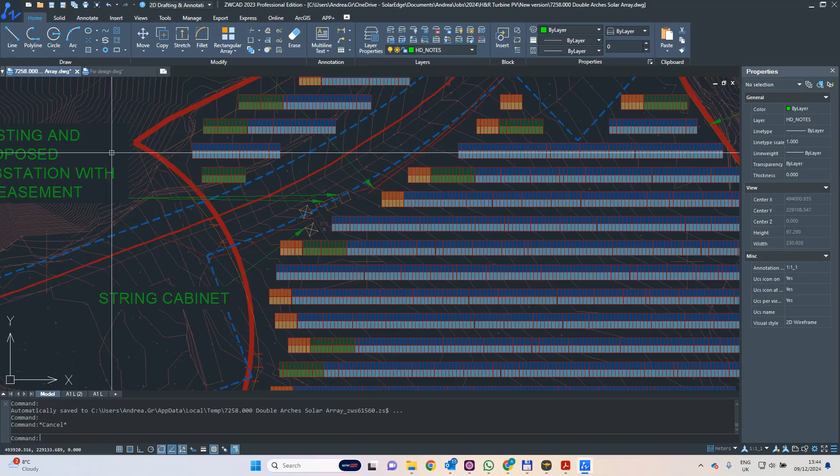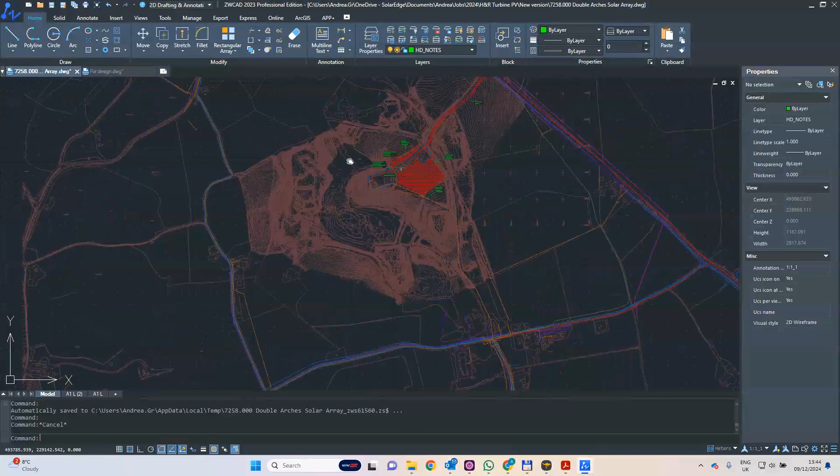Hi everybody, in this video I want to show you how to create a DXF file ready to be imported in Designer. Today I chose this design, which is a solar farm. As you can see, there are quite a few panels here, and there's a lot of things in this design that I don't actually need.

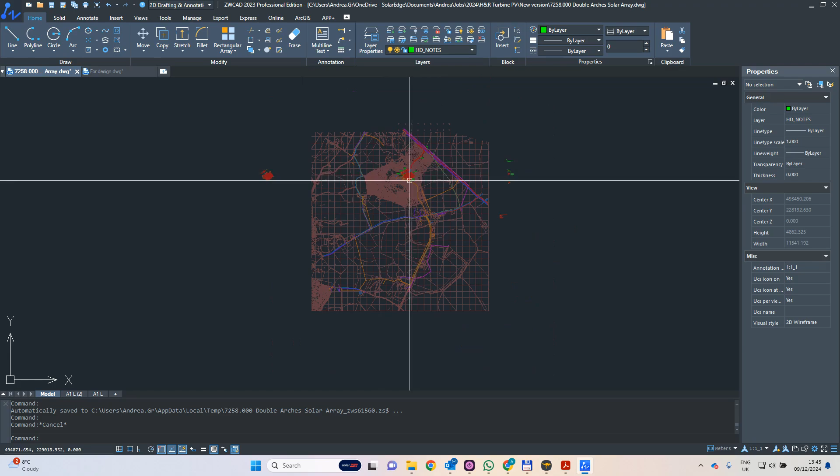As you can see also on top here, there's a lot of layout that I don't need. So the first thing you need to do when you prepare your file for Designer is to get rid of everything you don't need. You just need to identify what you actually need. In my case, what I need is the area where the panels will be installed and the panels themselves. I don't need any color, any fancy stuff, anything.

So first thing, clean everything. When I did that and cleaned everything, this is the final result. As you can see, this design is much cleaner. There's only the area where I want to put my panels and the panels themselves. Now, as you can notice, the layout of this drawing is also reduced to only 1 and 2, because those are the two that I needed.

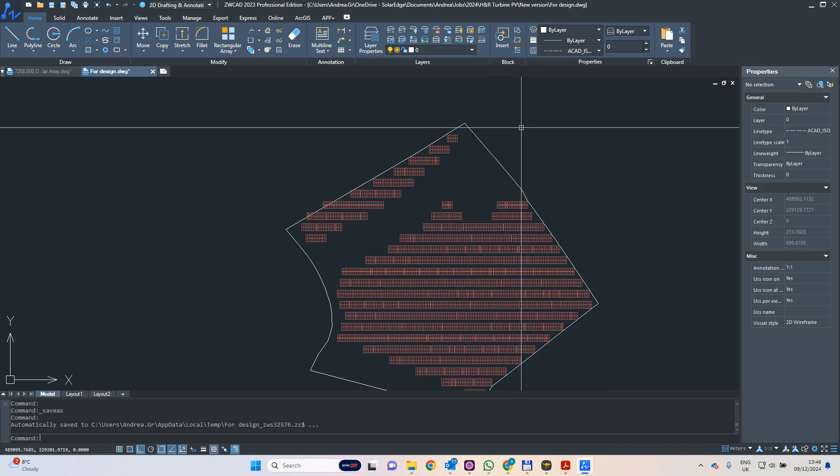If you have any obstacle, just add a third one, call it obstacle, where you put your obstacle on it. But what Designer needs is a layer 0, or layer called roof, where you put the layout of the building itself, and a layer called PV, where you put your panels, and eventually your obstacle.

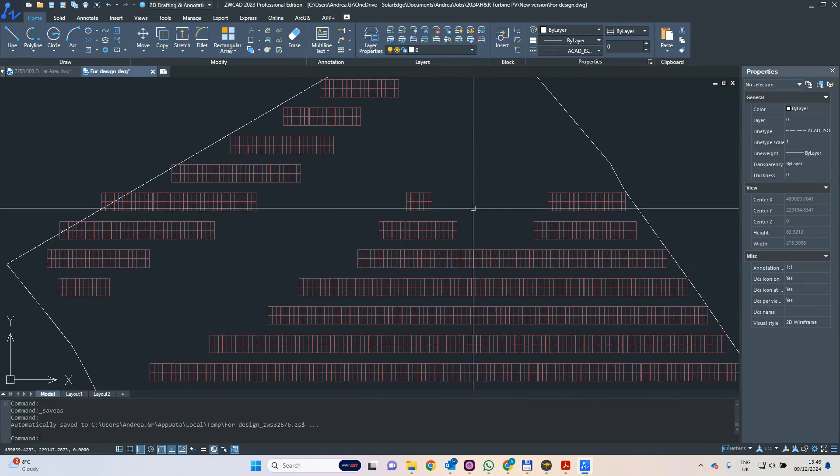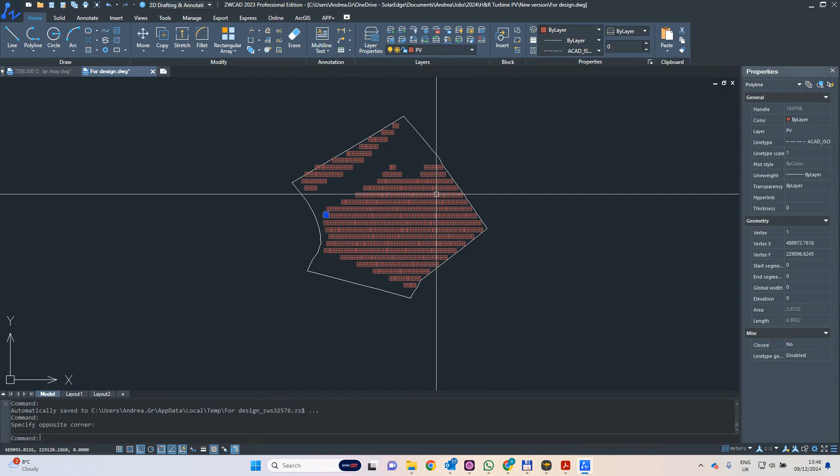Just a few notes on the design. What I did is I also redesigned the panels because they were only lines. But in order for the software to identify the panels, I needed to create polylines. So I created a polyline for each panel, just duplicated, really easy, really simple. In AutoCAD, you can do those operations quite quickly compared to Designer.

So now I have my design here. I need to convert this DWG to DXF. How to do it is really simple: you just go to Save As. When you arrive on Save As, you choose the name of the design you want. You open this window and you'll see that most likely you have the option to save as DXF at the bottom there, so choose the one you want. I think 2018 is absolutely fine. When you're happy with that, click Save and you're ready to go.

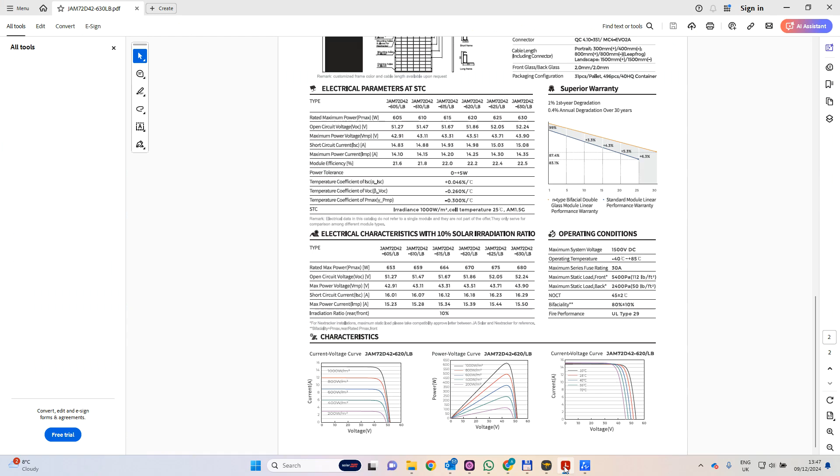When this is done, afterward you just need to jump into Designer. Of course, you need to prepare Designer ready for the DXF. In this case, I already prepared my design. I've already identified the area where I need to import my layout and also my DXF. But also what I did is I prepared the DXF of the panels that I wanted to use.

So now I'm going to go back into Designer. Really simple, I'm going to click on DXF. I'm going to choose browse on the computer for the DXF file that I created in order to import. In this case, I'm already in the right folder, I called that one previously for design. So I'm going to click on this one and open it.

So now, as I mentioned before, it's going to ask you for different layers. In this case, for me, the roof layer is layer 0, and the PV modules are the PV layer. Obstacle, in this case, I don't have any obstacle, so I didn't introduce that one. But if you have obstacles and put them in the layout, you will choose them from here. So now, when I've done this, move to the next step.

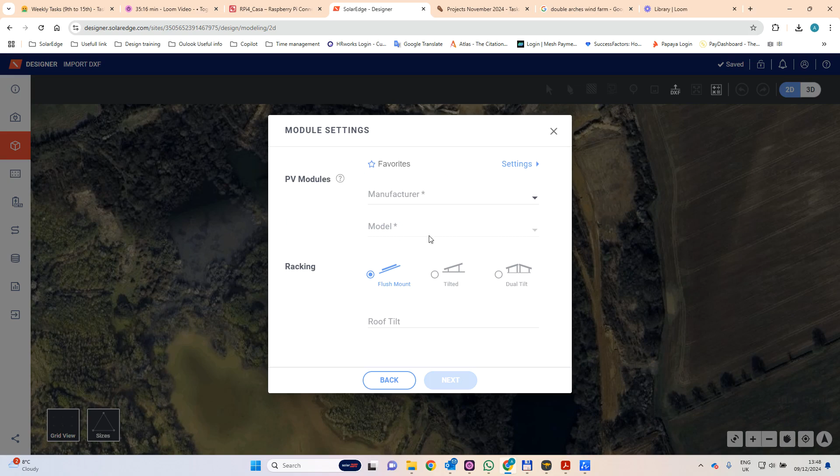Now it's my time to choose the panels. So like I did before, I have my PDF here. I'm going to go to JA Solar, and now we need to find the right panel.

JAM72D42, this one was mine that I created. Of course, tilt - you need to choose that, and you need to have the section. In this case, I have it on 25, and the height was 130, but this really doesn't matter for this example. I just want to show you that you need to have all the right details ready to introduce, because that is the data the software is going to work with.

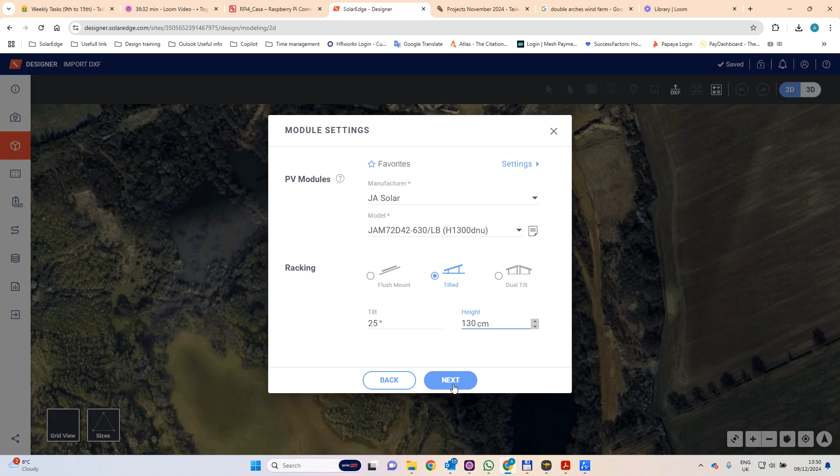When you've done all of this, you just press next, and the software processes the design and tells you the file has been uploaded. Now when I close, as you can see here, there is the layout of the area that I identified before, and if I go in here, there is the layout of the panels that I designed before.

Try to imagine if you had to design 3,840 panels one by one. In this case, as you can see, it's really simple - I import them, and they are in the exact location as per my design.

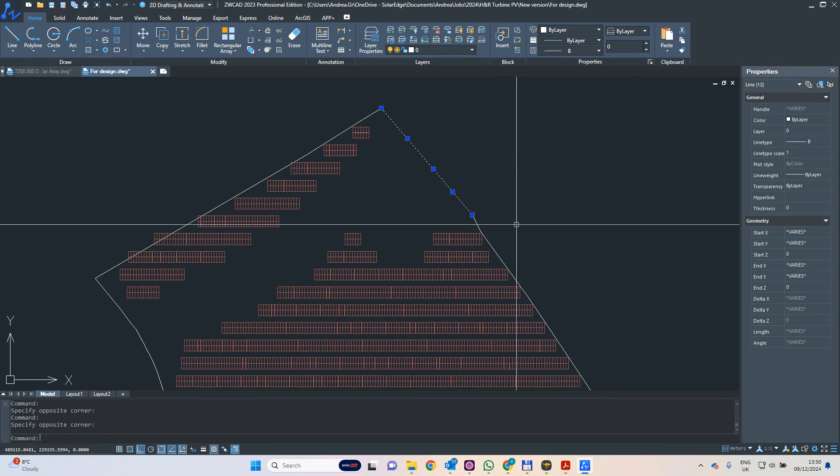Just a few things I'd like you to notice: in my original design, as you can see, I used lines and not polylines, and the software imported them exactly the same way. So if you have a really heavy design, it's better to use polylines, because it makes your life much easier. Otherwise, as you can see, sometimes the software can miss some parts.

Technically, in this case, I don't really care too much, because I already have in the field part of the layout that I need, so I can actually use it.

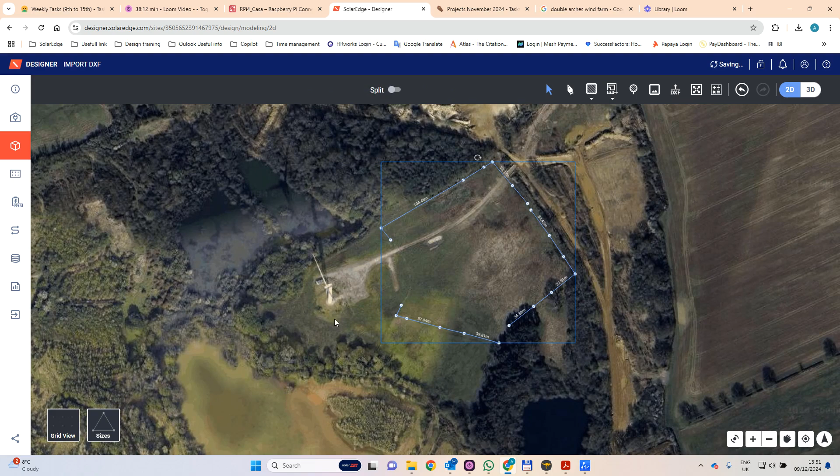As you notice, the software didn't bring the layout in the right place, so what I have to do is select this one quickly and just move it to the right place where I want it to be. When I've done this, most likely it's going to move into that position.

Just be aware that if you're moving the part on top, it doesn't move your panels. So you need to move your panels by yourself.

It doesn't really matter - I know exactly where they need to go. If you've done the design right, like in this case with a ground mount system, it's not really difficult. The problem is it's quite a heavy design, so it's going to take a while to move everything around while I'm recording, but the purpose is just to show you that honestly, you can move everything.

So as you can see, it's really simple. What I've done, instead of designing 3,840 panels, is import them as a DXF into my design.

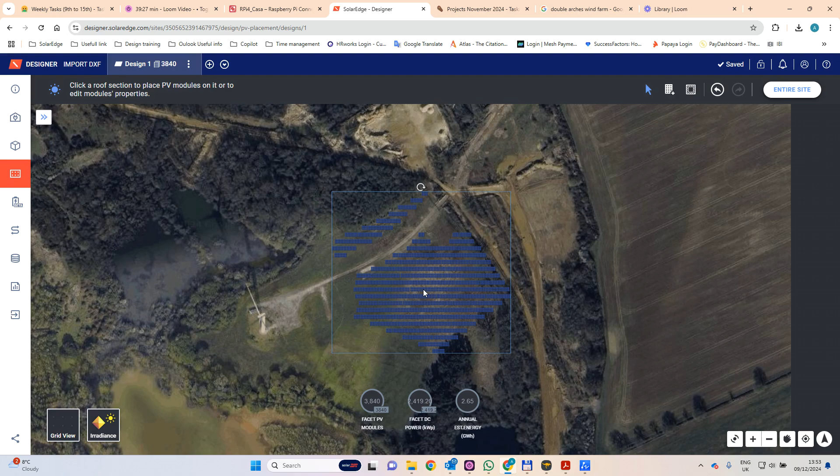This one is already correct - the panel is the right one. I just needed to select it to check if the panel is the right one. The panels should be the correct one.

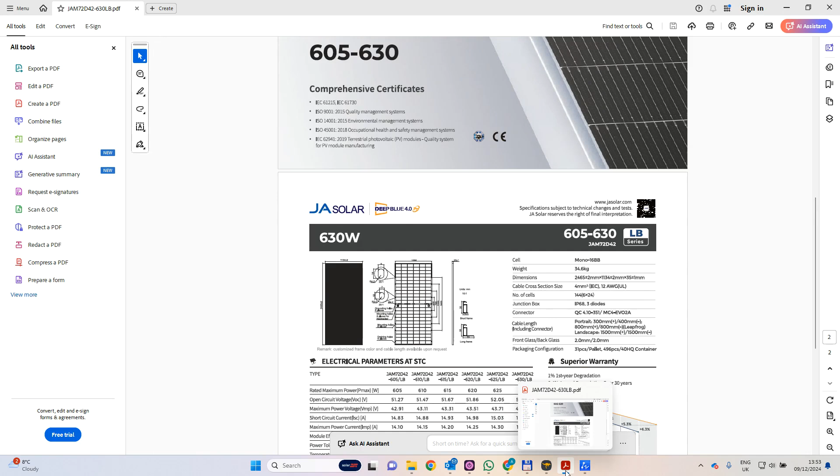JAM72D42-630, exactly the same as I used here. Here we go - that's how simple it is to import a DXF into your design.